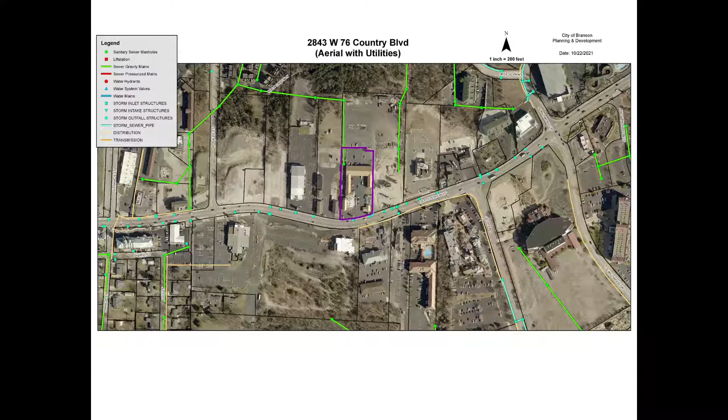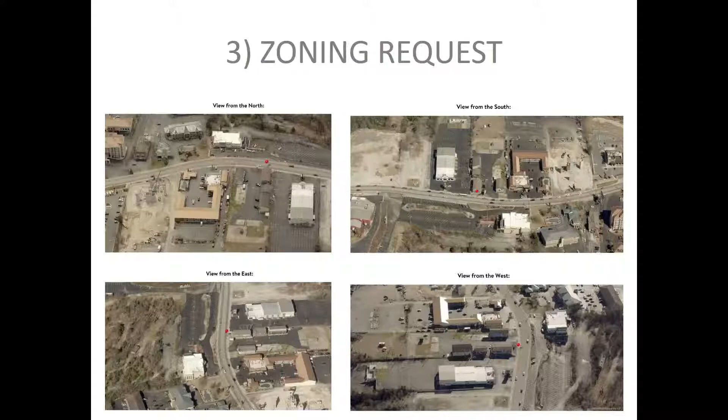We also include the four orthometric views if we need them for reference during our discussion.

Getting into the details of the request, the property today has the Getting Basted restaurant, which will remain based on the proposed site plan, and the Bald Knobbers Motor Inn, which is proposed to be removed. The Bald Knobbers Motor Inn also has an office building and pool area that will be renovated by the applicant, which we'll show you momentarily.

The restaurant moving into that office building and pool area will be known as Bahama Bucks. They're proposing a 4,300 square foot renovated building with a drive-through window, which is the need for the special use permit. The drive-through window would be located on the west side of the building. They're also looking to fill the pool to the rear of the building and provide outdoor seating areas both in front and to the rear of the property.

The stacking lane is one of the most important things we look at with any drive-through. In this request, it's located in the side yard and rear yard, to the west and north of the property. They're showing approximately 320 feet of length, and using our calculation of 20 feet per typical vehicle, that fits about 16 cars. So it's quite an extensive drive-through with more than ample space for the function of the restaurant.

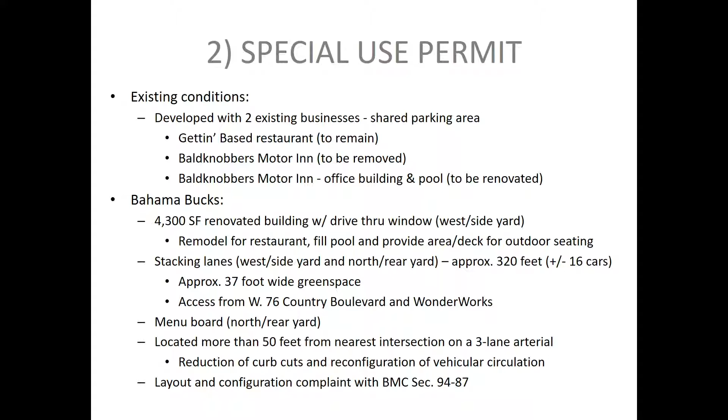They're actually proposing to reduce a curb cut and remove the existing monument freestanding sign on the property, which really made the situation much better. Overall, their proposed site plan does comply with Branson Municipal Code Section 94-87 from a layout and configuration standpoint.

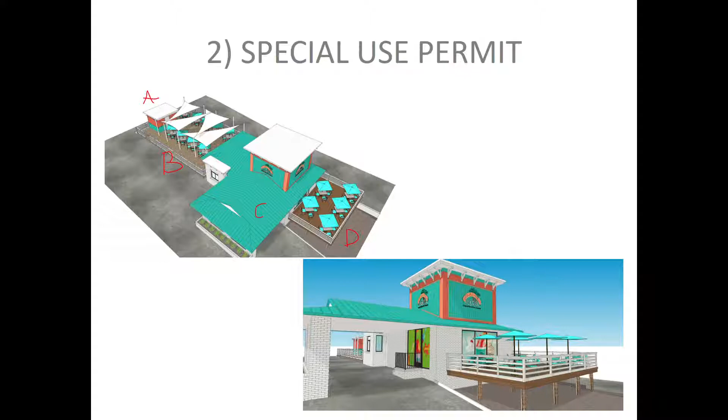Kelsey, I have a question - go back to the site plan if you would. For internal pedestrian ways, since they're the same owners, I don't see listed or shown any pedestrian ways within the property, east-west across the property. The concern of the commissioners, rightfully so, is we want to see the street front pedestrian way be effective, attractive and ample. But within your property, have you considered people walking back and forth across the stacking lane and over to the main restaurant, over to the parking area?

Yeah, we could take that more into consideration as we develop the plans further. We've got a couple spots called out for pedestrian crossing, but we can make them more clear.

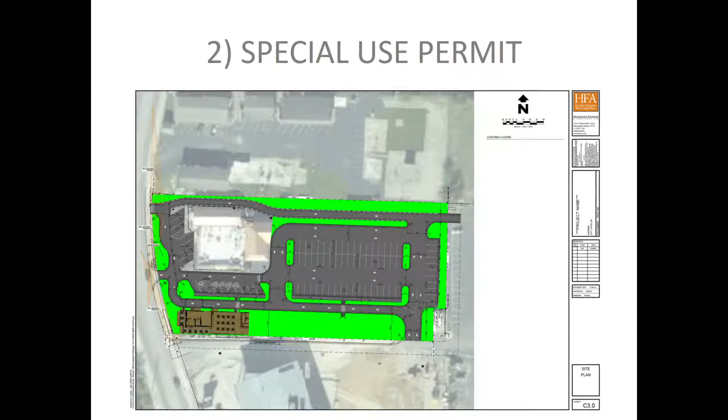All right, thank you. Commission, do you have any other questions for either staff or the applicant? Thank you, you might want to stay right where you are. Does anyone here tonight want to come to the podium and ask questions regarding this request for the special use permit, either to speak in favor or in opposition? Okay, hearing none, well, thank you.

Do I hear any additional discussion on the part of the commission? Any amendments or changes wanting to be made? In that case, we'll take a roll call vote.

Thank you, Chairperson. Now open vote. Commissioner Romine? Yes. Vice Chairperson O'Day? Yes. Commissioner Richards? Yes. Commissioner Howden? Yes. Commissioner Lloyd? Yes. Commissioner LeBlanc? Yes. Chairperson Davis? Yes. Commissioner Nichols? Yes. Vote's now closed, motion is carried.

Thank you, thank you, congratulations. Thanks for coming to town. Get to work.

Next item on our agenda shifts over to a zoning request for a zoning change, and the applicant in this case is us, the city of Branson.

Chairperson Davis, I need to recuse myself from item 3, please. All right, let the record show that Commissioner Richards is not participating in discussion or vote of this item.

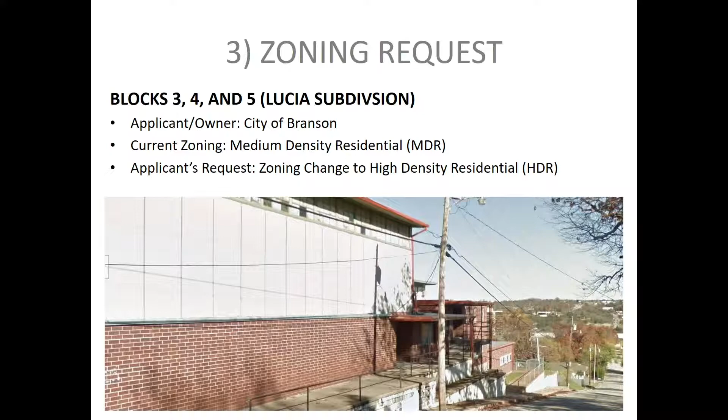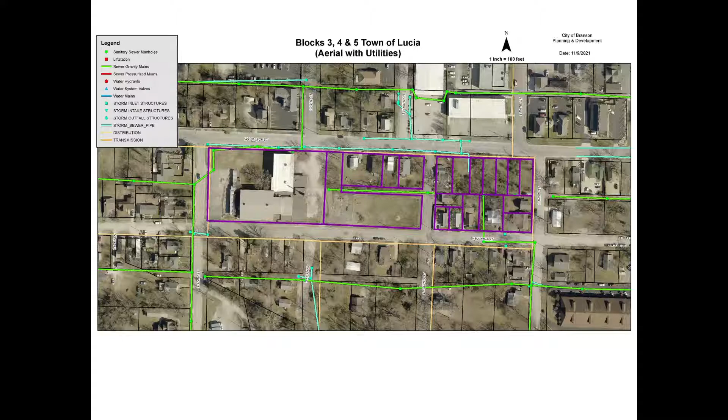Joel, before you go back to that—okay, so in the middle of that middle block, there's a utility easement or a road or something like that. That's a platted alleyway that was never vacated by the city.

You can also see that to the north in those blocks, as well as to the east, a portion of that. However, this portion of the alleyway had been vacated—I don't know the exact timing. You can also see another portion of an adjacent alleyway that had been vacated at some point.

Usually that's when adjacent property owners expressed interest to the city and requested that vacation, and the city thought it was appropriate and necessary to make that vacation. So that'd be a future possibility? Yeah, any adjacent property owners could definitely make that request, absolutely. Thank you.

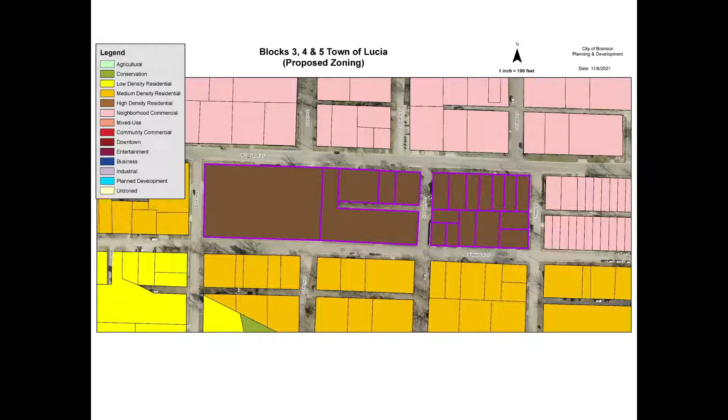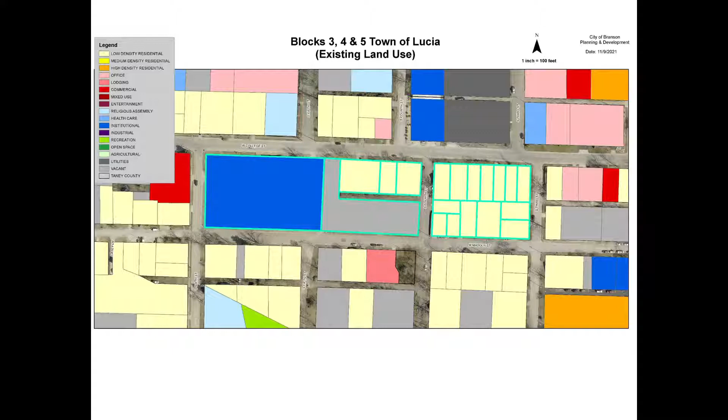Then the existing land use map shows a mix of both residential uses. However, it is labeled that the old school is institutional, but as we all know in the room, that school hasn't functioned as a school for many years. There's also several vacant properties in the area, and some more commercial uses you can see on the edges of our map. We also have our orthometric views if we need to reference them.

And then getting into the details: the request in total includes 19 properties that total just under 5 acres in size. We've highlighted already that the former Branson High School is a big part of this area, but there's also single-family residential structures that exist today within the area. And there are several nightly rentals that were constructed along College Street within the past year that also exist within this property area.

Unfortunately, when we did our future land use plan with the Community Plan 2030, high-density residential was not a zoning district that was part of that discussion and included in the plan. It was something that was added later to add another level of detail into our zoning districts.

So there's no designation on our future land use plan to show where those areas should exist, unfortunately. However, we do believe, because of its adjacency with the neighborhood commercial and the other properties zoned medium density residential, that it provides a more appropriate transition or buffer between those other areas of the neighborhood that are single-family homes from the neighborhood commercial area.

We have obviously been trying to have redevelopment of the old school since the city purchased it back in 2011, and we have had some interest over the years. Particularly, there was a group out of Kansas City that we were very close to a couple of times. However, their offer was contingent on getting Missouri Housing Development Commission dollars, and they were unsuccessful in getting those in the two years they applied. So, unfortunately, that contract was never followed through on that purchase.

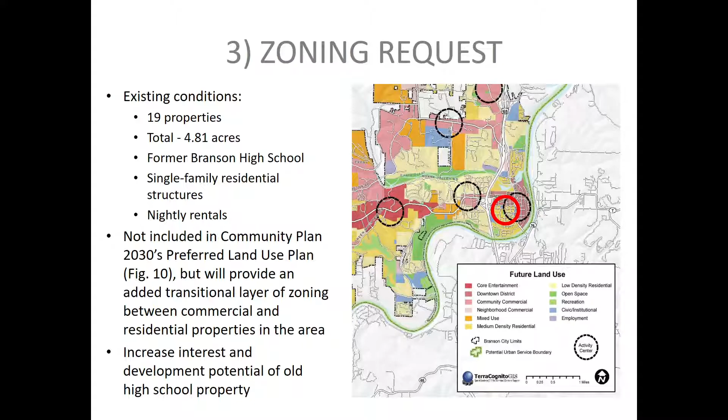We do believe there is a need to get that property redeveloped so it doesn't continue to be an eyesore on the neighborhood, and we believe that this change in zoning may help increase interest in the property and redevelopment potential. The medium density residential district has less maximum density opportunities than the high density residential district, so we think increasing the amount of allowable units within the property as well as the adjacent properties may get somebody interested in taking this property on and having a positive contribution to the neighborhood and the housing situation currently in the city. So with that, staff recommends approval and we're happy to answer any questions.

Thank you, Joel. Does the Commission have questions of Joel at this point? We're going to go ahead and entertain those, and then we'll open for public comment after that. I see that Commissioner Howden has a question. Please go forward.

Thank you, sir. Joel, are rehabilitation facilities considered civic or institutional? No, it really comes down to what the use is. I guess it depends on how it got rehabbed. If it was rehabbed to be residential units, that would be residential. If it's rehabbed to be a school or a nonprofit space, then that would fall into some other use category.

Sorry, I think I worded it a little wrong, but wasn't the Church Army institution within this building at one point? No, not to my knowledge. There are other nonprofit organizations located to the south of these properties, further down 6th Street, that have been there for many, many years. But to my knowledge, there's never been any not-for-profits other than the school district located on the city's properties. Okay, thank you, sir.

I've got a question, Joel. Is the city aware of any potential plans to actually redevelop this property? So it's my understanding that there is an interested party, and that's something to pursue for sure. I think that's something the Board of Aldermen may have had discussions about, or at least been introduced to. At this point, I don't know all the specific details, but I believe there is some interest out there.